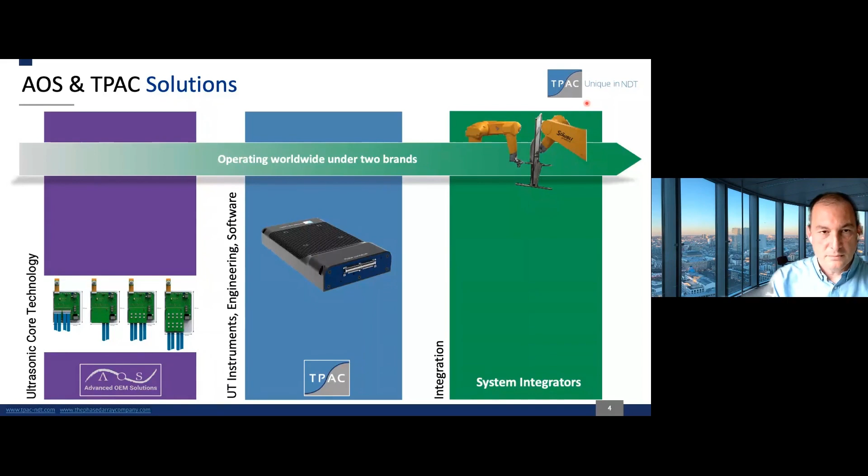Aerospace applications. Well, I would say that we are quite transversal in terms of applications in aerospace. We are working for the production and maintenance of different structures in engines and aerostructures. We have specific solutions for inspection of metals and composites. Specifically, we have some solutions for inspecting high attenuating materials, including dry inspection. And many times we start with NDT problems that are originated by new materials and new processes like additive manufacturing. And we also have specific solutions for inspection of complex shapes.

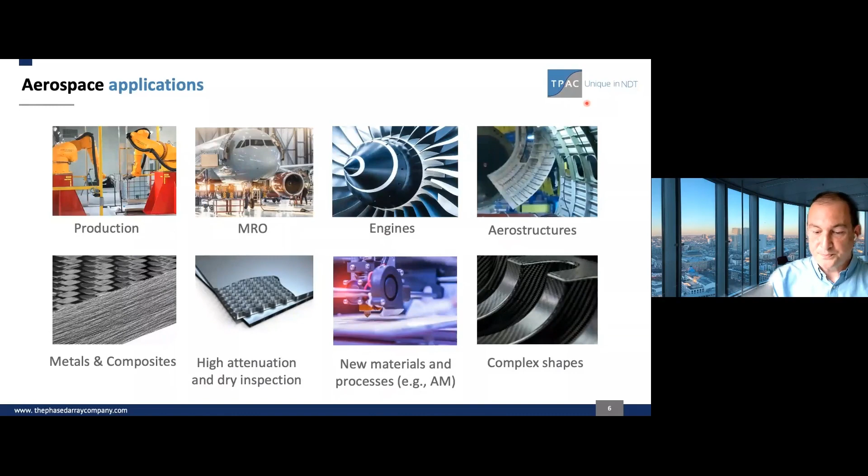Robotic applications are a very common one for us. As I said before, we are collaborating for this purpose with different integrators, providing them with very small form factor instruments, also high performance to meet the requirements of these automated applications, and being able to inspect at very high speeds. Our instruments are also rugged and IP67 design. This allows us to place the instruments very close to the probes and minimize in this way the length of the cables.

We also have some resources for a proper synchronization with our robots. And this allows for different configurations in single and twin robot systems for doing through transmission ultrasound, phased array, or TFM or related methods.

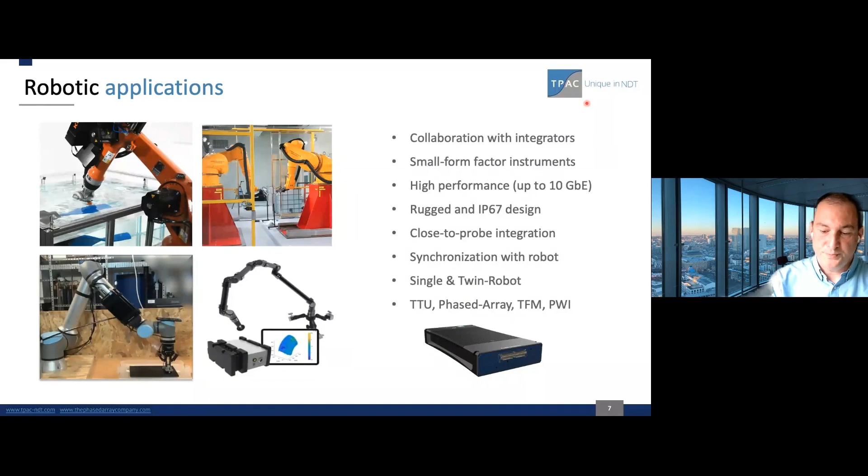For the spectrum of composites, we cover the different range of applications going from conventional UT and phased array UT, which normally are used for low attenuation materials, monolithic laminates, for instance, and also through transmission ultrasound, being able to inspect very attenuating materials, demanding a high dynamic range.

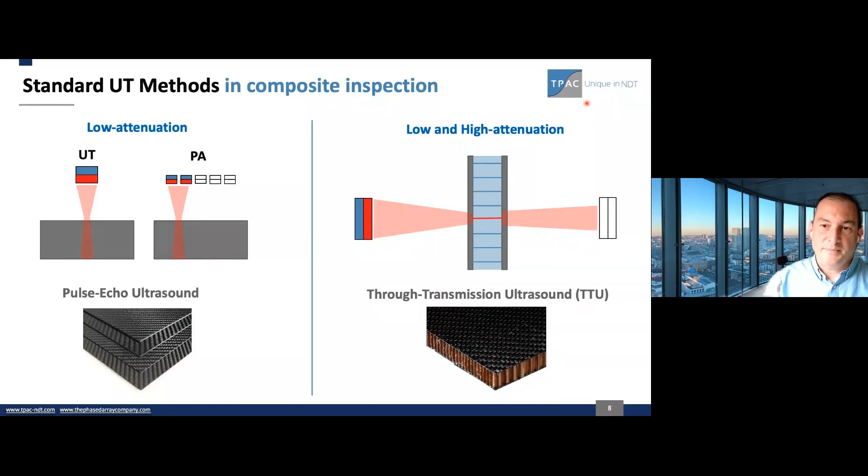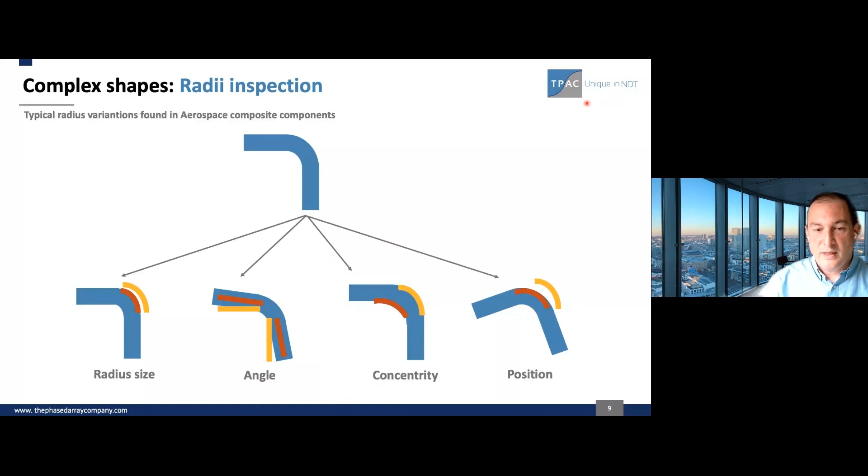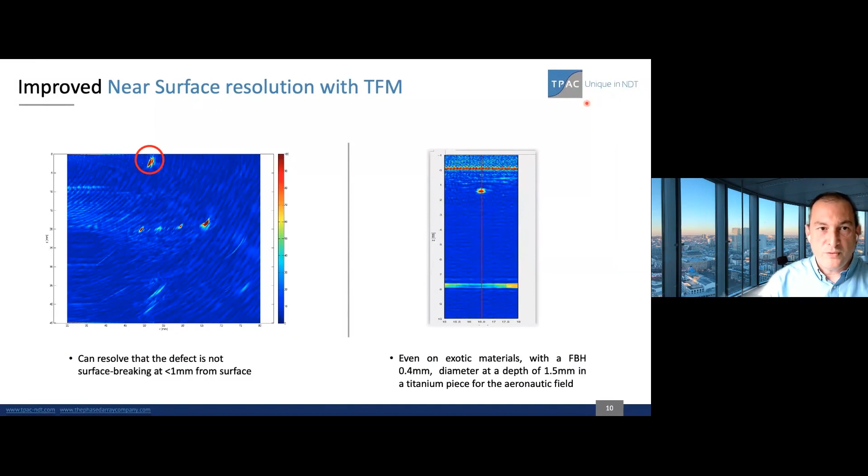Complex shapes. Okay, this is a very common application in aerospace. One of the most typical ones is the radii inspection. In the inspection of radii, we find different, let's say, deviations or variations from the design in radius, in angle, in concentricity, or position. So we have specific solutions for the inspection of this type of components. Another benefit of our technologies is the possibility to improve the near surface resolution.

Additive manufacturing is a typical application and a growing, I would say, application for us. In this case, we need to detect very small things, and porosity is a very common issue that can appear in this type of materials, and normally this type of porosity becomes very small indications.

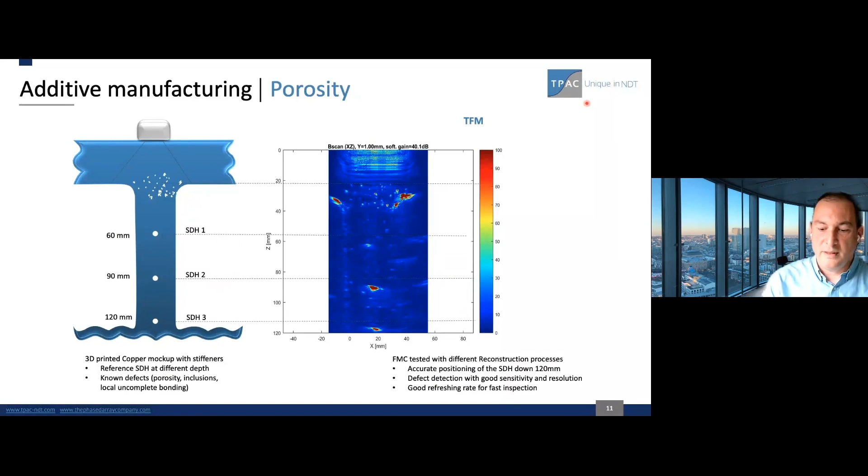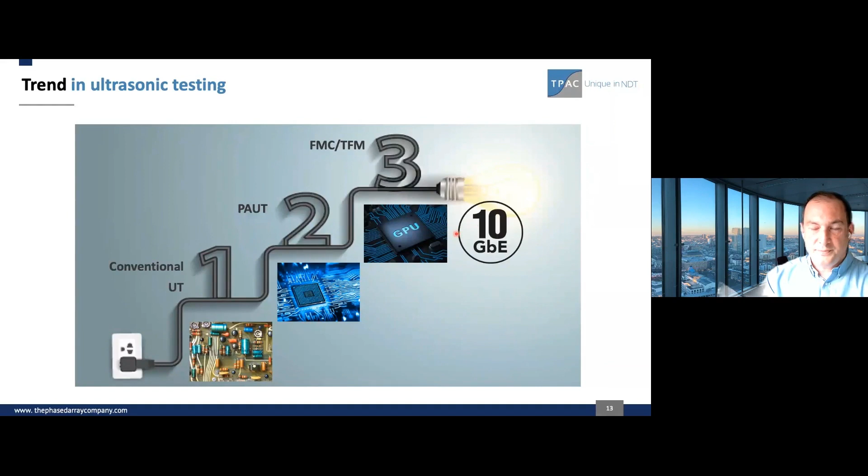About the technologies we use in aerospace, this is our vision of how the technologies have evolved. So today we can do high-speed real-time imaging based on the FMC TFM method, thanks to the last generation GPUs and high-speed 10 gigabit Ethernet data links. So we can cover from the conventional UT method to the most advanced TFM FMC methods.

In conventional UT and phased array UT, everything is about getting the best possible beamforming through mechanical or electronic means in the case of phased array UT, and with TFM and PWI and other methods, the goal is to get the best possible image with all the data available in the fastest way. In TFM, we shoot element by element, and we capture all the signals that we get in the different elements. So in this way, we can produce a high resolution image.

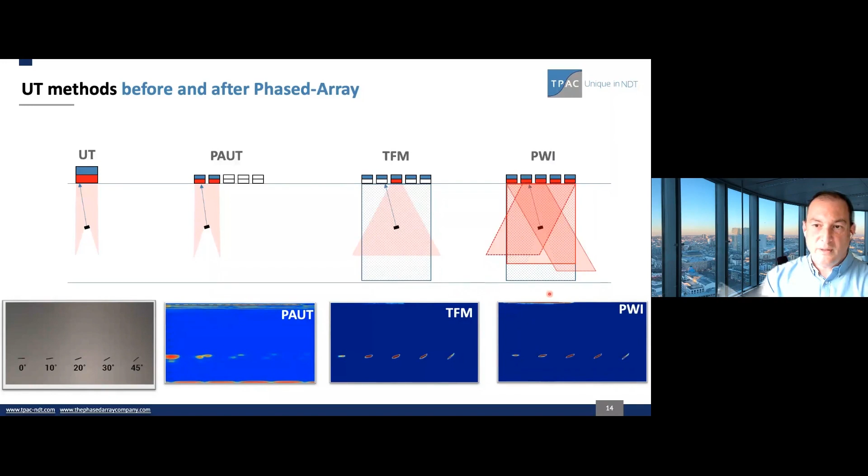In the case of PWI, we can get this imaging much faster, as instead of triggering element by element, we can generate flat plane waves in different directions and still do a TFM image. So we can get image qualities up to the level of TFM in a much faster way. We can even get a higher speed than the one we can get in phased array UT.

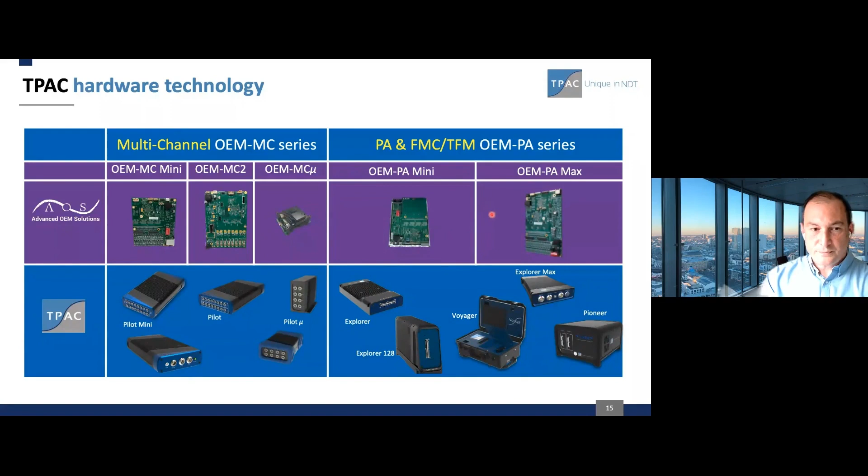From TPAC, we provide different hardware technologies for conventional UT and phased array UT. About software, we provide different possibilities. We have an open platform in terms of integration. So we build our own software applications on top of this platform, both standard solutions and also custom solutions for our customers. Other customers integrate our systems based on this open platform at different, let's say, abstraction levels. We also provide an open data format, and we are compatible with CIVA analysis and ULTIS.

About the adaptive methods, this is an evolution of the TFM image. So we can use the same FMC dataset to learn the shape or the position of the surface and do a TFM image based on this profile. So in this case, we don't need any iteration. So there is no physical overhead, as we found in the phased array UT adaptive methods. We can still get the benefit of TFM doing total focusing in the whole volume. Most importantly, we don't flatten or modify the profile in the B-scan. So we preserve the geometry of the surface.

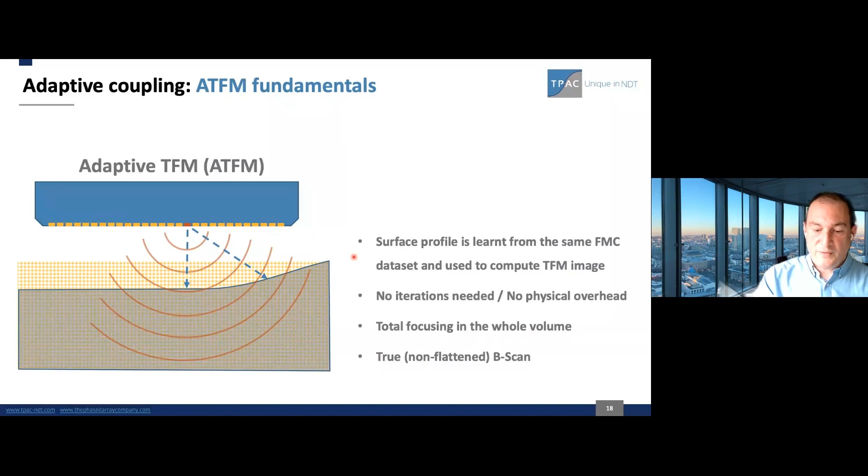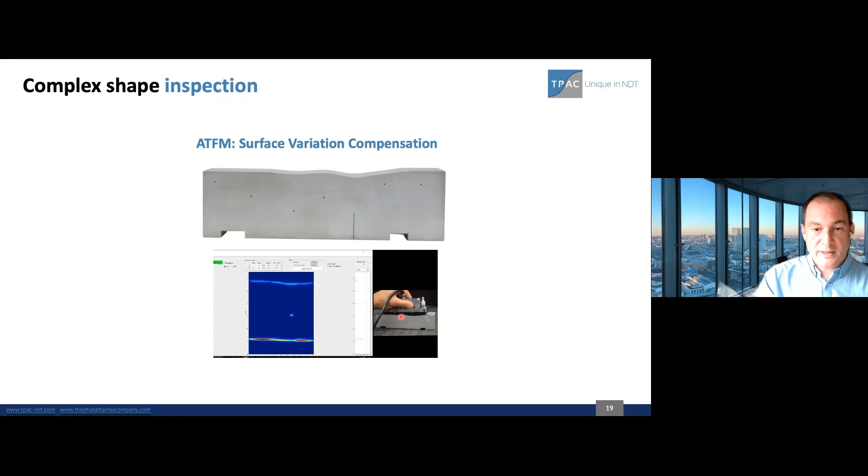Here is an example of doing ATFM on this wavy block. In this video, we can see how the variations of the surface are compensated, so we can still detect the side drilled holes using this flexible wedge. In this slide, we can see how we preserve the surface measured by ATFM and detect the different holes compared to a conventional TFM image.

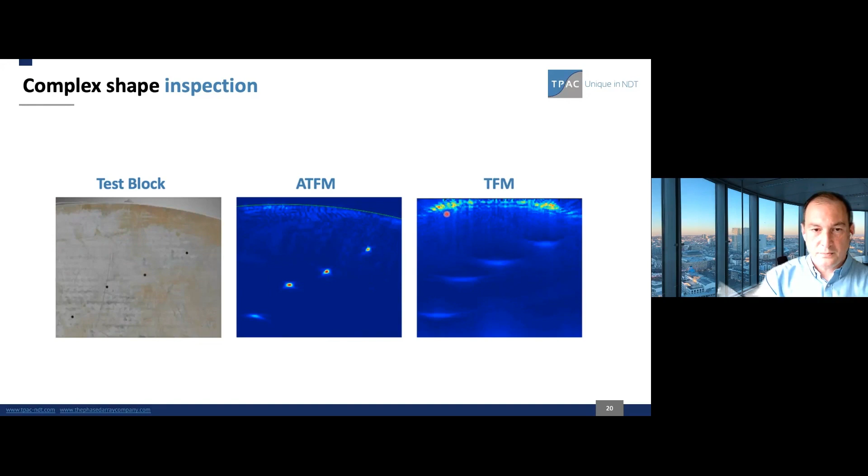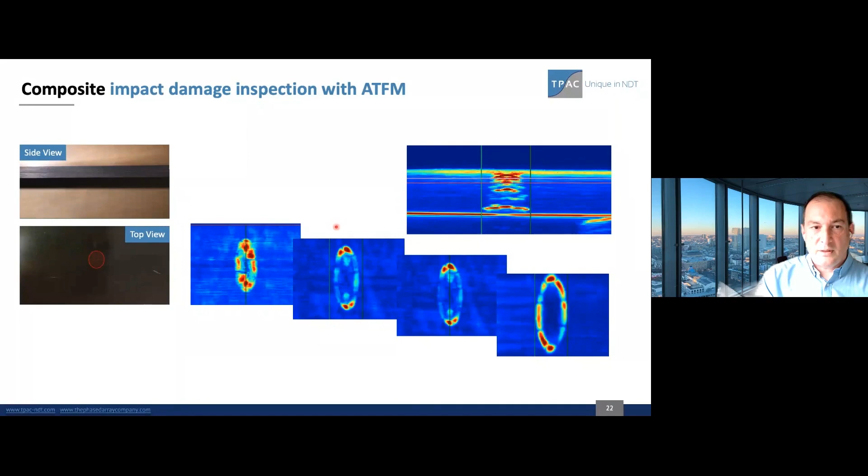One of the applications of ATFM is just positioning, or getting a better positioning of the part when the accuracy or the tolerance of the mechanical system is not, let's say, perfect. So we can compensate these small or slight variations of the probe position with respect to the part, even for flat surfaces. This is an example using ATFM inspecting the impact damage created in a monolithic composite.

Arbitrary wave generation, this is another technology, quite interesting. In normal ultrasound, we excite the probe with a negative square pulse. So we can speak in this case about unmatched acoustics. In arbitrary wave generation, we can excite the probe using different wave shapes like Gaussian shapes or chirp or bursts. And on top of this, we can receive the signals using a matched filter. And this matched filter is like a demodulation of the emitted signal. So in this case, we can talk about matched acoustics. The main benefit of this technology is that we can improve signal to noise ratio and the penetration capability of ultrasound.

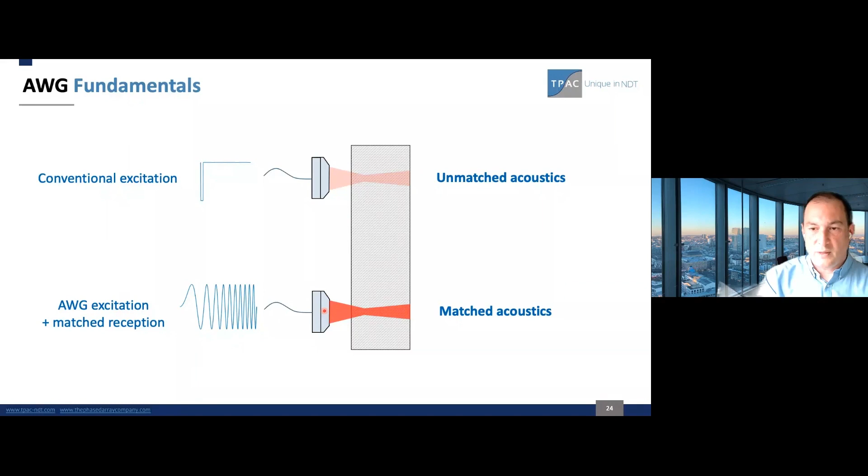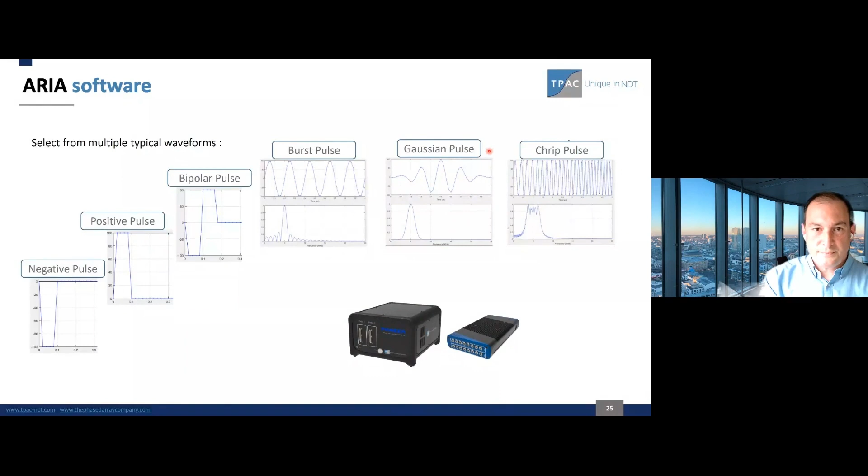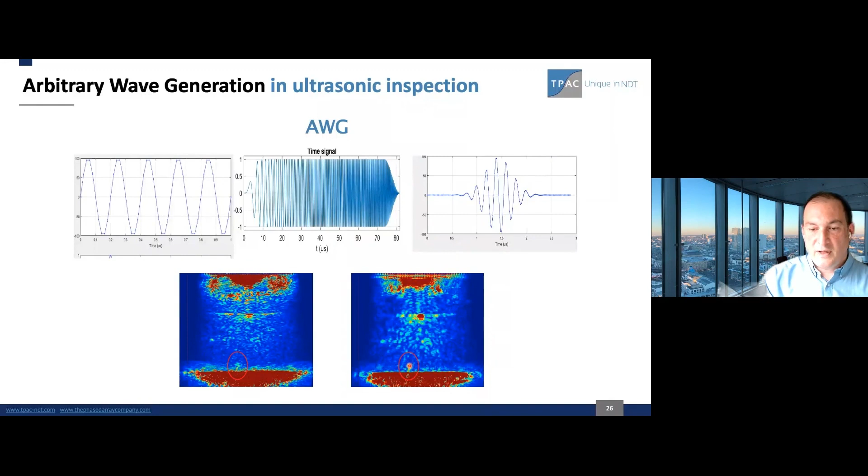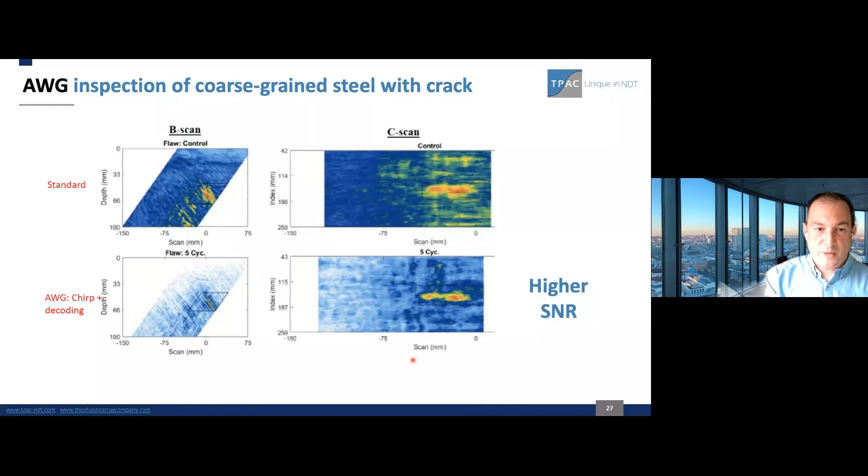This is an example on a real part. This is a very small crack using a normal TFM compared to TFM plus AWG, and we can see a significant improvement of the signal to noise ratio and resolution. This is another example showing an improvement of the signal to noise ratio using a chirp AWG.

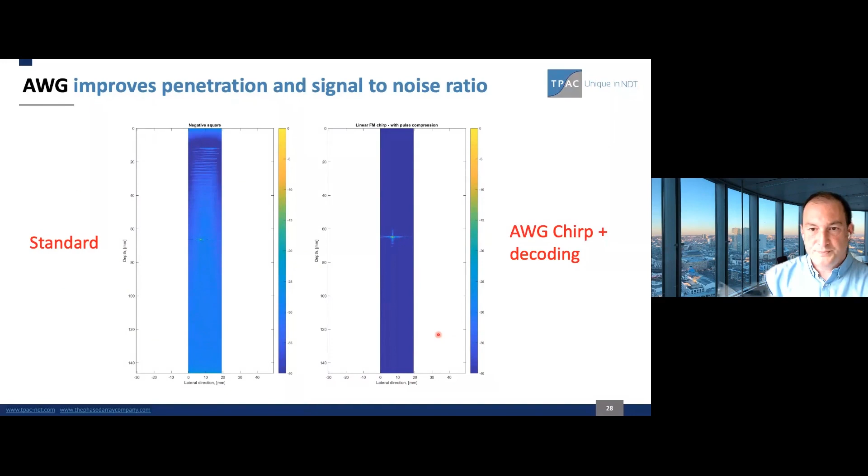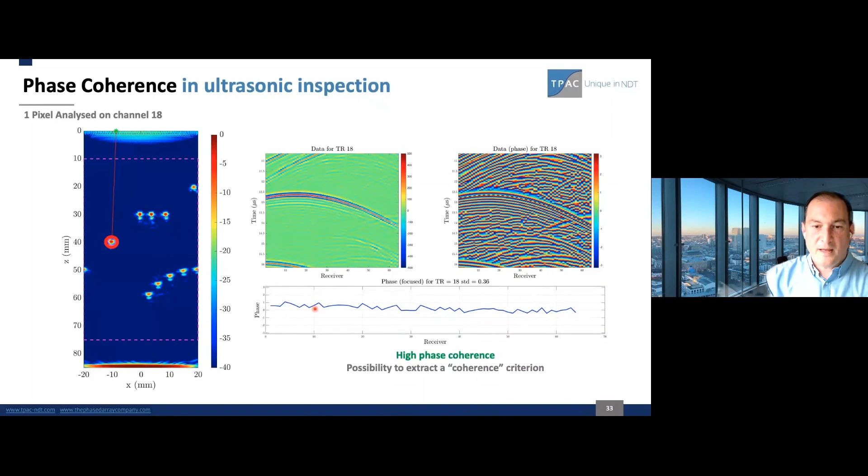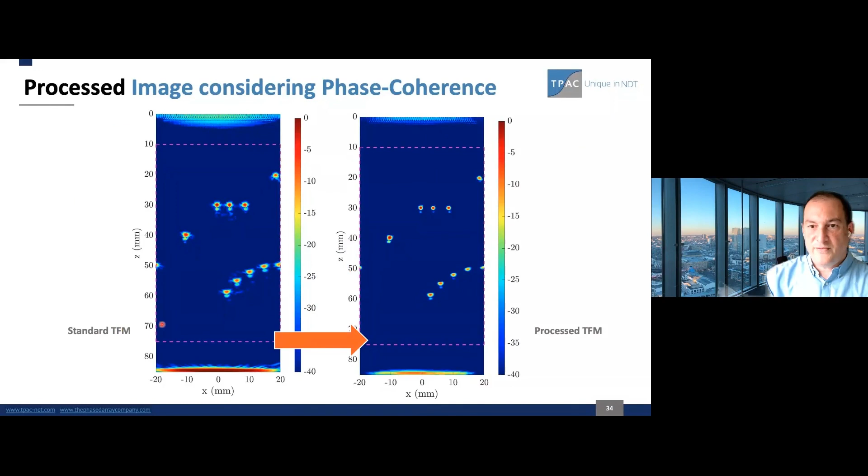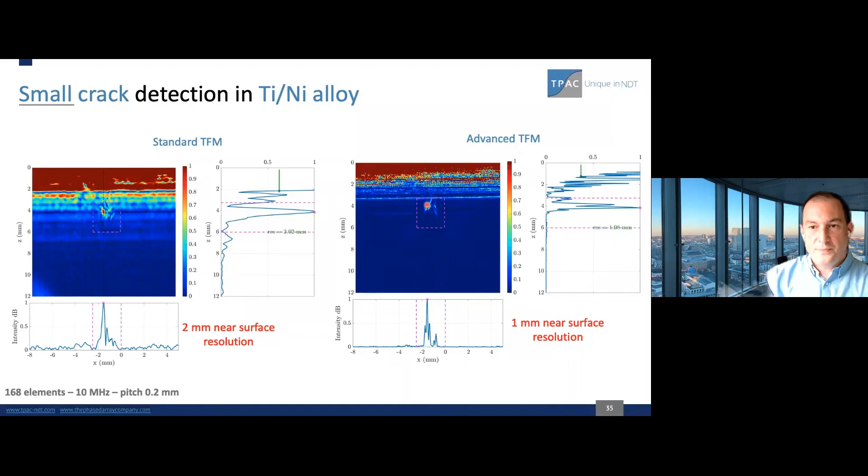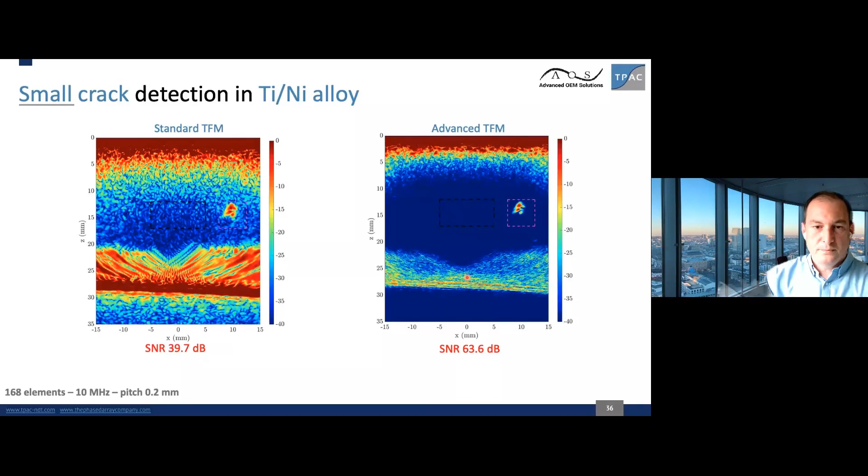So about our portfolio for aerospace applications, we have different instruments. All of them are rugged design. We have the best performance to size ratio in the market. Data links are 1 gigabit Ethernet and 10 gigabit Ethernet, depending on the instrument. And we also have different IOs and synchronization resources for integration in robotic systems.

The smallest member in the family is called Pilot Micro. It's a very small conventional UT system. It has 8 channels working in parallel and a 400 volt pulser. The bigger version is called Pilot. It's the highest end conventional UT in the market. It has 8 channels, again working in parallel, and a broad bandwidth going from 50 kilohertz to 20 megahertz. This broad bandwidth allows for a wide range of applications, including air-coupled UT.

This module provides a very high dynamic range. We can acquire the data with a 26-bit resolution, which means 156 dB of information acquired. We can obtain up to 130 dB of noise-free dynamic range. And all this makes unnecessary the use of gain control, so we can acquire the signals without worrying anymore about the gain setting. We also have 400 volt unipolar and bipolar pulsers, and as an option, we can also include an AWG pulser.

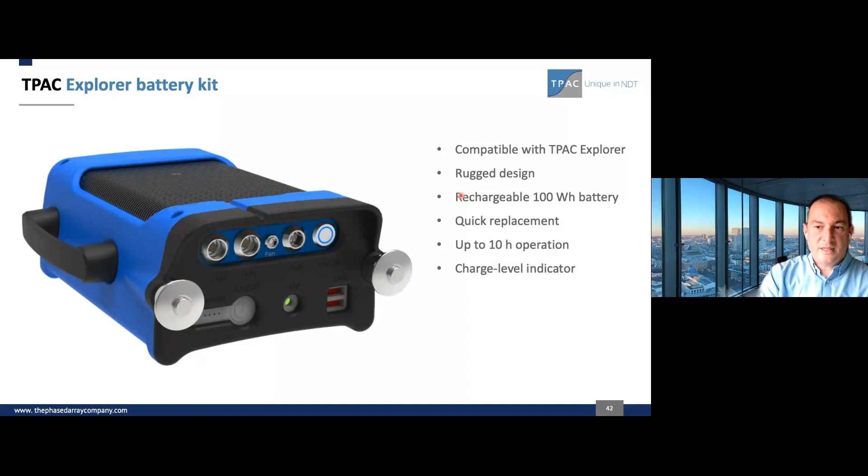Explorer Max is a higher performance module compared to Explorer, thanks to the 10 gigabit Ethernet link. Its configuration is a full parallel one with 64 channels. And we also have the possibility to add an AWG pulser. This is the 128 channels version of Explorer Max. In this case, we have two 10 gigabit Ethernet links.

This is Pioneer. This is the most complete and advanced ultrasound system. We can combine phased array UT, PWI, TFM, PCI, and also conventional UT. We can also include an AWG pulser, and we have different configurations, multiplexed and full parallel, up to 1024 and 4096 channels. In this case, we can have up to four 10 gigabit Ethernet links.

Finally, Voyager is a portable platform for MRO, for maintenance of aircraft. This is an all-in-one rugged wheel case solution, integrating everything, including the CPU with a 12-inch screen, keyboard and touchpad, and the TPAC Explorer. And there is also a slot for the UT probe and a long duration battery.